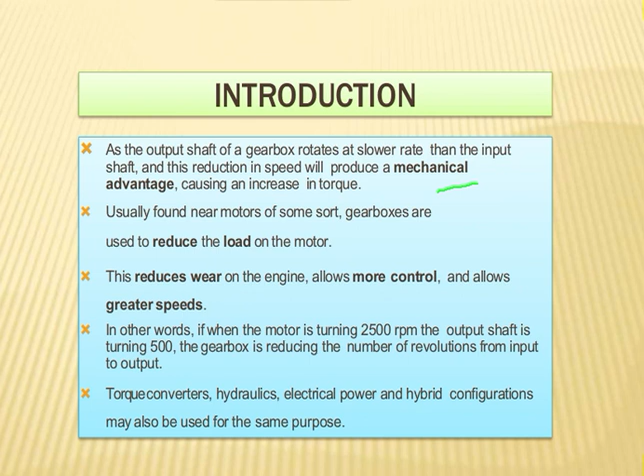What are the basic types of gearboxes? Sliding mesh gearbox, constant mesh gearbox, synchromesh gearbox and epicyclic gearbox. An engine may consist of one or more gearbox. There may be gearboxes which are a mixture of these types.

Sliding mesh gearbox is the oldest type of manual transmissions used in automobiles. However, in this type, the mechanical efficiency was very low and the noise level was quite high in manual transmission. Moreover, the driver required considerable skill in changing the gears.

An improvement was achieved in the form of a constant mesh gearbox, which resulted in higher mechanical efficiencies and lower noise level due to the use of helical gears instead of straight spur gears in case of sliding mesh type. Still, the driver had to adopt double declutching to change gears. A further improvement with the help of a synchromesh device solved this problem also, and these days a synchromesh type of gearbox is a universally used type of automotive manual transmission.

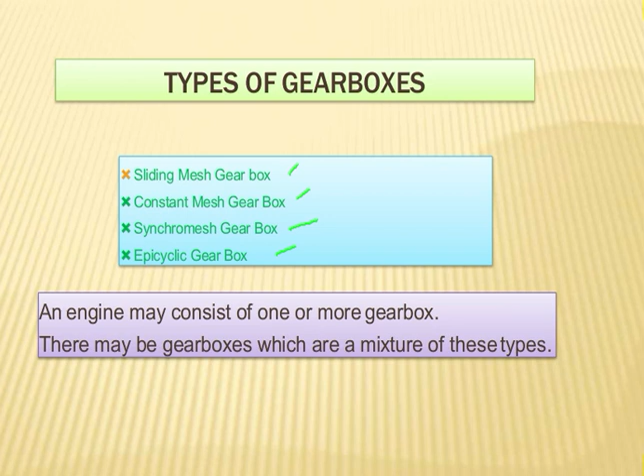This is a schematic diagram of sliding mesh gearbox. This is main drive gear, this one is counter shaft, and this one is main shaft. First gear, second gear, third gear, and top speed engaging dogs.

In this type of gearbox, gears are engaged and disengaged by sliding of the gear wheels. Gear wheels on the main shaft engage with gear wheels on the lay shaft or counter shaft by sliding themselves.

The power comes from the engine to the clutch shaft and hence to the clutch gear, which is always in mesh with a gear on the lay shaft. All the gears on the lay shaft are fixed to it, and as such they are all the time rotating when the engine is running and the clutch is engaged.

3 forward and 1 reverse speeds are attained on suitably moving the gear on the main shaft by means of selector mechanism.

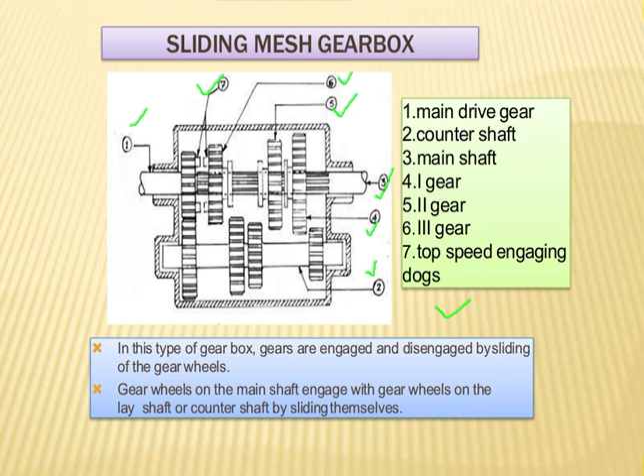Constant mesh gearbox. This is the schematic diagram of constant mesh gearbox. First speed gear, second speed gear, main shaft, third speed gear, top and third speed engaging dogs, top gear, primary shaft or main drive gear, and counter shaft or cluster gear.

In this case, gear wheels on the main shaft and lay shafts are constantly engaged and the rotary motion is transmitted to the main shaft by engaging dog clutches. In this type of gearbox, all the gears are in constant mesh with the corresponding gears on the lay shaft.

The gears on the main shaft, which is splined, are free. The dog clutches are provided, which are free to slide on the main shaft. The gears on the lay shaft are, however, fixed.

When the left dog clutch is slid to the left by means of the selector mechanism, its teeth are engaged with those on the clutch gear and we get the direct gear. The same dog clutch, however, when slid to the right, makes contact with the second gear and second gear is obtained.

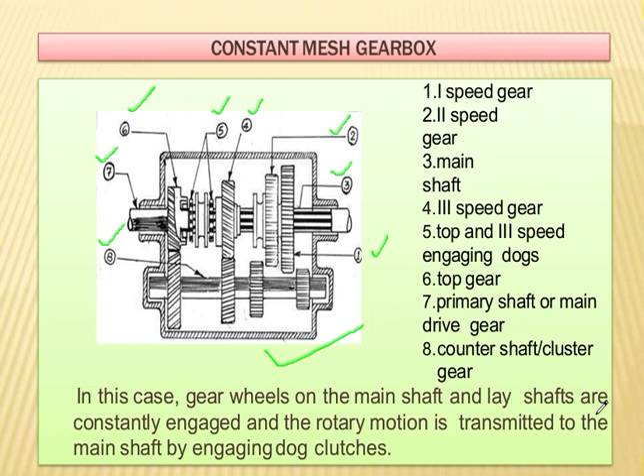This is another schematic diagram of constant mesh gearbox. You see, this is the lay shaft, this one is clutch, output shaft, first gear, this one is second gear, this one is third gear, this one is selector fork, this is dog gear, this one is fourth gear, and this one is fifth gear.

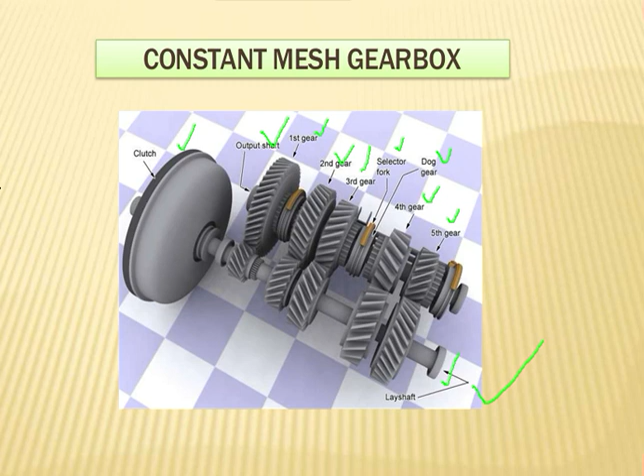This is another schematic diagram of constant mesh gearbox. You see, this one is primary drive, this one is clutch, this one is engagement dog, input shaft, output shaft, and shift forks.

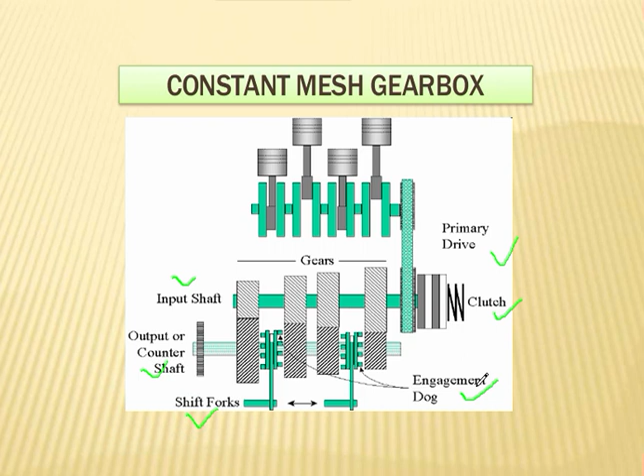Advantages of constant mesh gearbox over sliding mesh gearbox. Helical and herringbone gears can be employed in these gearboxes and therefore constant mesh gearboxes are quieter.

Since the gears are engaged by dog clutches, if any damage occurs while engaging the gears, the dog unit members get damaged and not the gear wheels.

By suitably designing the dog clutch, the gear changing can be made easier. Damage to the dog clutch is less likely because all the teeth are engaged at a time.

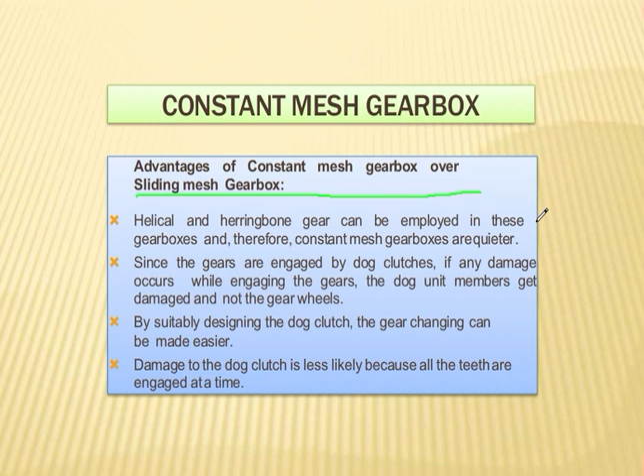Synchromesh gearbox.

This type of gearbox is similar to the constant mesh type in that all the gears on the main shaft are in constant mesh with the corresponding gears on the lay shaft. The gears on the lay shaft are fixed to it, while those on the main shaft are free to rotate on the same.

Its working is also similar to the constant mesh type, but in the former there is one definite improvement over the latter. This is the provision of synchromesh device which avoids the necessity of double declutching.

The parts which ultimately are to be engaged are first brought into frictional contact which equalizes their speed, after which these may be engaged smoothly.

But I have told that if the car is moving, the output shaft is always turning. That is because it is ultimately connected to the wheels.

The lay shaft is usually connected to the engine, but it is free spinning once the clutch has been operated. Because the gears are meshed all the time, the synchro brings the lay shaft to the right speed for the dog gear to mesh. This means that the lay shaft is now spinning at a different speed to the engine.

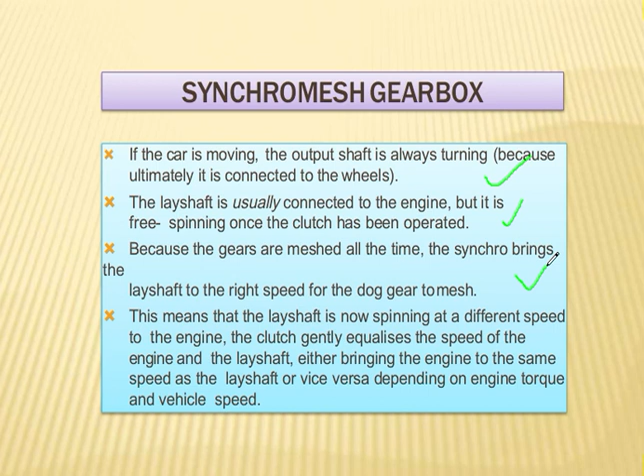The clutch gently equalizes the speed of the engine and the lay shaft, either bringing the engine to the same speed as the lay shaft or vice versa, depending on engine torque and vehicle speed.

As it approaches the helical gear, it makes friction contact with the conical hole. The more contact it makes, the more the speed of the output shaft and free spinning helical gears are equalized before the teeth engage.

This is all about synchromesh gearbox.

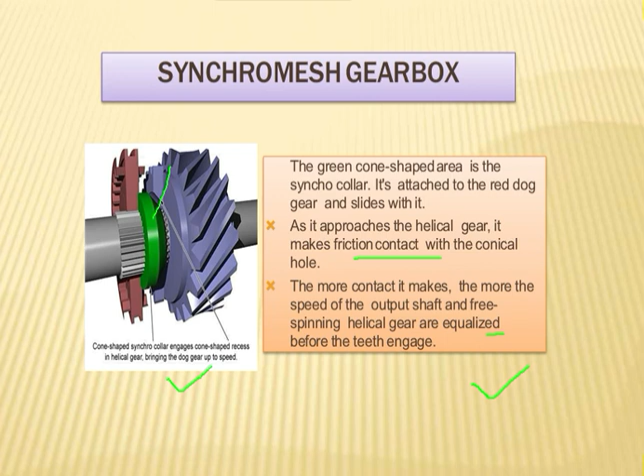Let's discuss epicyclic gearbox. Present day automatic transmissions consist of multiple clutches, torque converter and epicyclic gearbox. Automatic transmissions operate basically by controlling vehicle speed and engine load. Increasing vehicle speed needs changing gears upwards, whereas increasing engine load necessitates change from higher to lower gears.

For the speed factor, a sensitive control unit, mechanical, hydraulic or electrical, is driven off a suitable point beyond transmission, and thus its control action becomes sensitive to vehicle speed. The engine load factor is introduced by the position of the accelerator pedal. Thus, the engine load sensitive control unit is operated by the depression of the accelerator pedal.

An epicyclic gearbox consists of 2, 3 or even 4 epicyclic or planetary gear sets. A simple set has a sun gear about which planets turn around. These planet gears are carried by a carrier and a shaft and are also in mesh internally with a ring gear, which is also called internal gear or annulus.

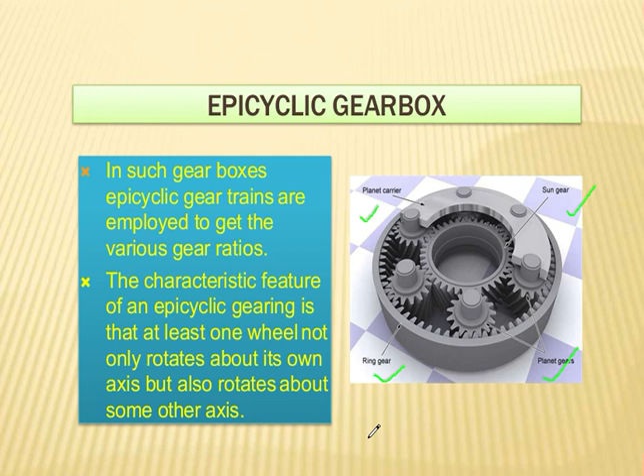Automatic gearboxes typically use one or more compound planetary gear sets instead of chaining regular gear sets together. They look just like a regular planetary gear set from the outside, but inside there are two sun gears and two sets of intermeshing planet gears. There is still only one ring gear though.

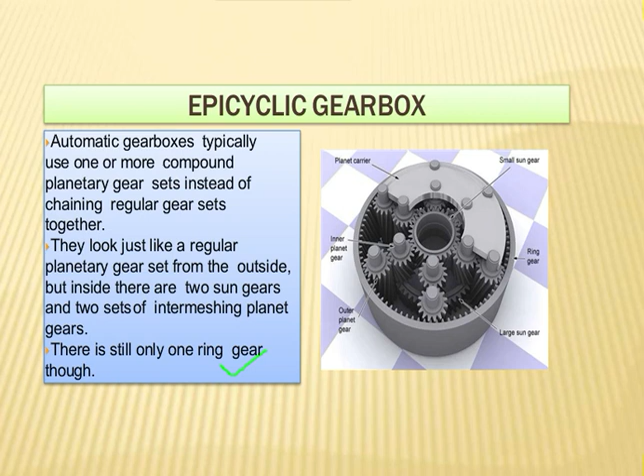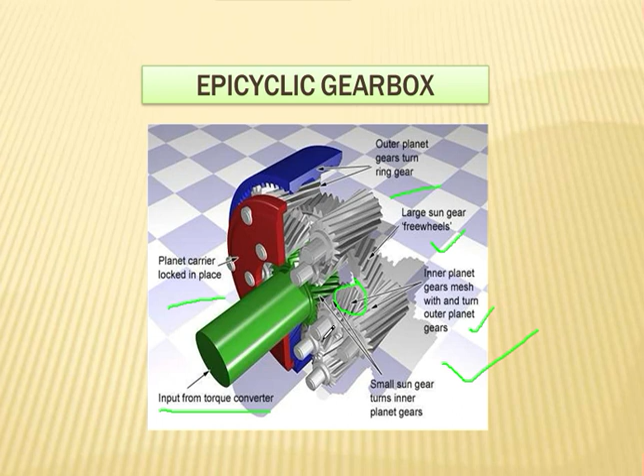Overdrive: the highest gears may be overdrive types that increase the output speed. This is a device to step up the gear ratio in the car. It is fitted in between the transmission and the propeller shaft.

Overdrives have become very popular in the USA. It enables a high cruising speed to be attained with a comparatively low engine speed, up to about 20 to 25% less, on long journeys. This results in less wear of the engine parts and decreased vibration and noise. As the friction losses at lower speeds are less, there is a saving of fuel also with the overdrive.

Overdrive is generally fitted on top gear only, but in some sports cars, overdrives are also fitted on gears other than the top gear, which increases the torque ratios available. For example, when overdrive is fitted on top, third and second gear, 7 forward speeds or torque ratios are available.

When the sun gear is locked with the casing, that is, it becomes stationary, the speed of the output shaft is increased, that is, overdrive is engaged. When, however, the sun gear is locked to the carrier or to the ring, solid drive through the gear train is obtained. Thus, depending on the locking of the sun gear with casing or with carrier, the overdrive or the normal direct drive is obtained.

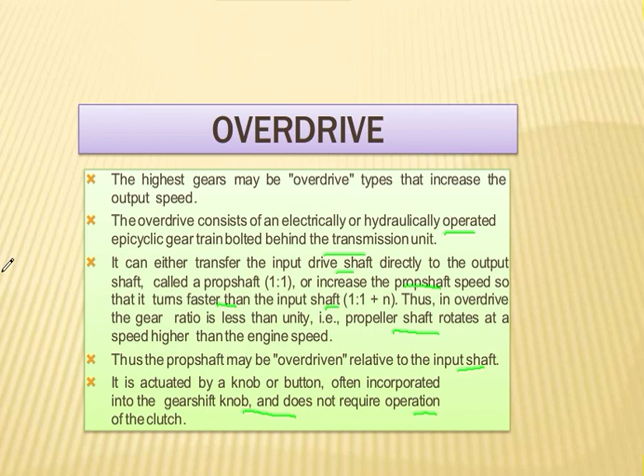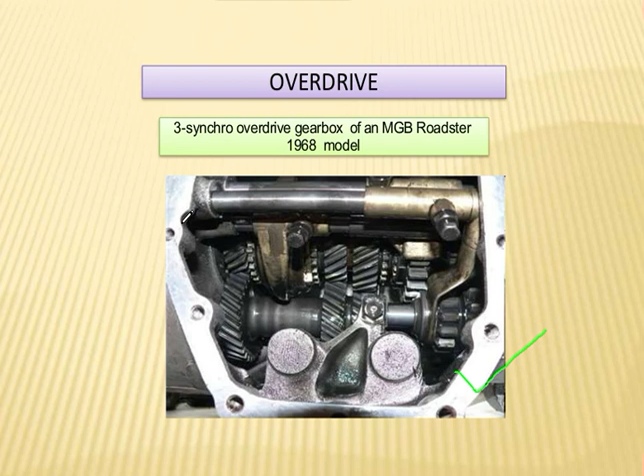Types of transmissions: common types include manual transmission, semi-automatic transmission and automatic transmission. Uncommon types include dual clutch transmission, continuously variable transmission, infinitely variable transmission, electric variable transmission, hydrostatic, hydrodynamic and electric.

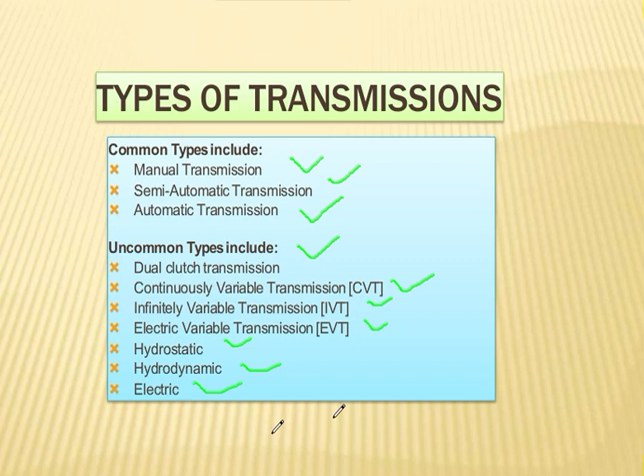Manual transmission I have already told earlier. A simple but rugged sliding mesh or unsynchronized, non-synchronous system found in racing cars, older heavy-duty trucks, and some agricultural equipment. Here, straight-cut spur gear sets are spinning freely and must be synchronized by the operator matching engine speed to road speed to avoid noisy and damaging gear clash.

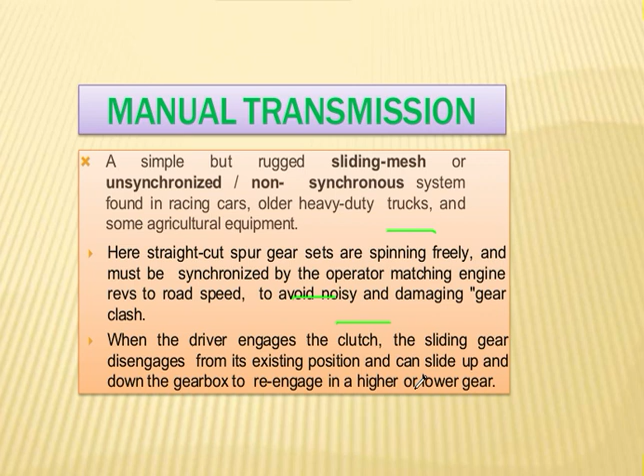When the driver engages the clutch, the sliding gear disengages from its existing position and can slide up and down the gearbox to re-engage in a higher or lower gear.

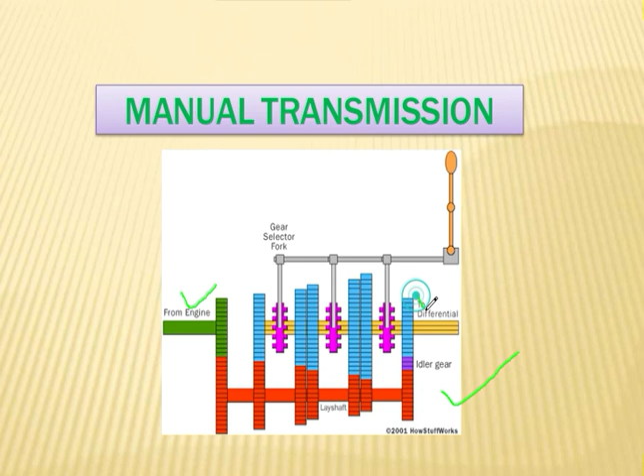This is the schematic diagram of manual transmission from engine to the differential by gear selected. This one is layshaft.

Sequential gearbox: manual transmissions use the standard H pattern in the shifter. The manual transmission in a motorcycle is nothing like this. On a motorcycle, you shift gears by clicking a lever up or down with your toe. It is a much faster way to shift. This type of transmission is called a sequential gearbox or a sequential manual transmission.

It turns out that most race cars use sequential gearboxes as well.

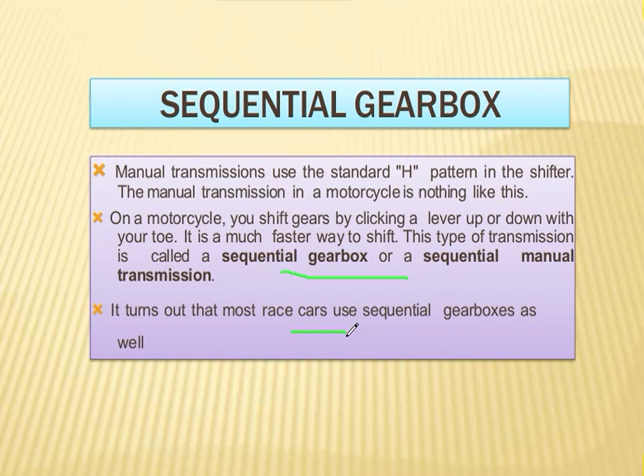There are 3 forks, 1, 2 and 3, controlled by these 3 rods that are engaged by the shift lever. There is still a set of gear selector forks that move collars that engage gears. The only difference is the way the control rods are manipulated. The H pattern is eliminated and replaced with a different motion. In a race car, the motion of the shift lever is either push forward to upshift or pull backward to downshift.

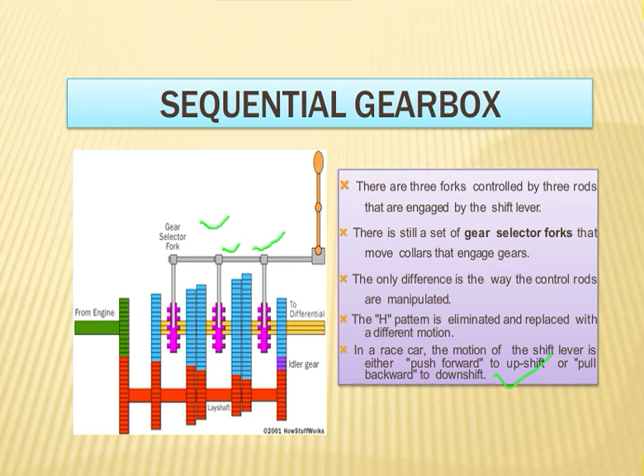Semi-automatic transmission: this is the schematic diagram of semi-automatic transmission system. This one is motor or engine. This one is second gear. This one is third gear. This one is first and this one is fourth gear. This one is differential.

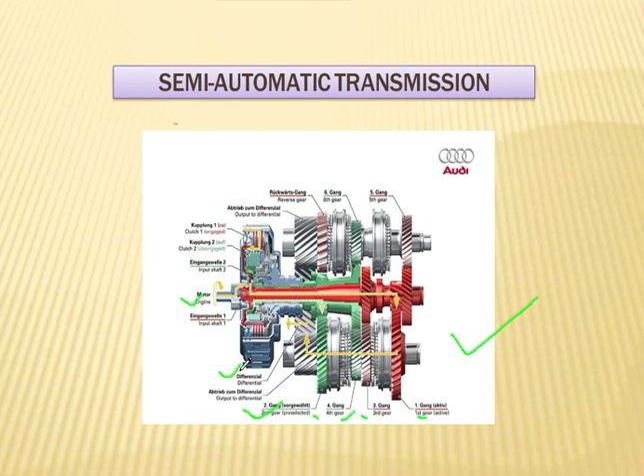Automatic transmission: epicyclic gearing or planetary gearing are used in an automatic transmission. An automatic transmission will select an appropriate gear ratio without any operator intervention. They primarily use hydraulics to select gears depending on pressure exerted by fluid within the transmission assembly.

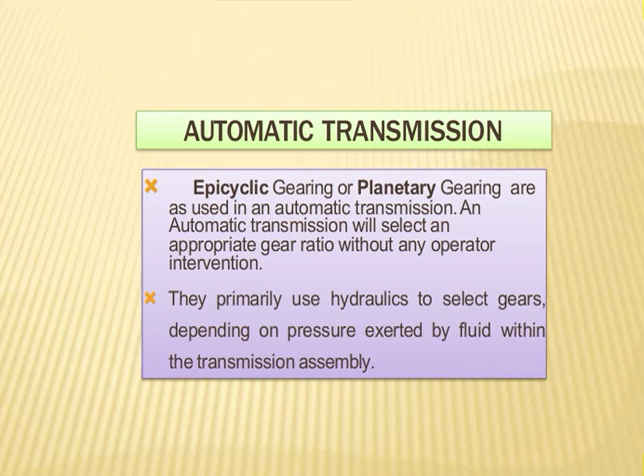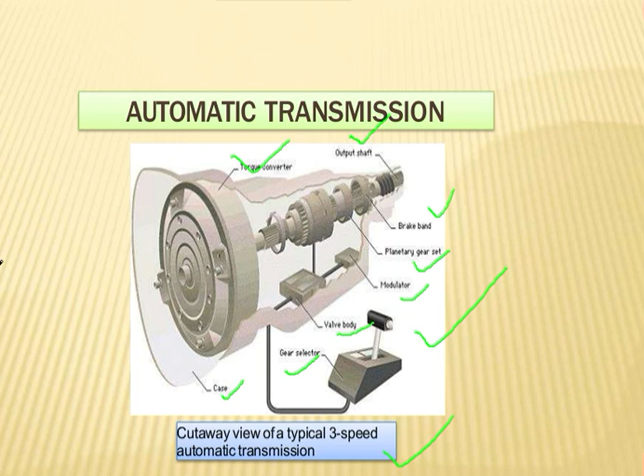What are the advantages of automatic transmission? Let's discuss. If the car is in overdrive on a 4-speed transmission, the transmission will automatically select the gear based on vehicle speed and throttle pedal position. If you accelerate gently, shifts will occur at lower speeds than if you accelerate at full throttle. And if you floor the gas pedal, the transmission will downshift to the next lower gear.

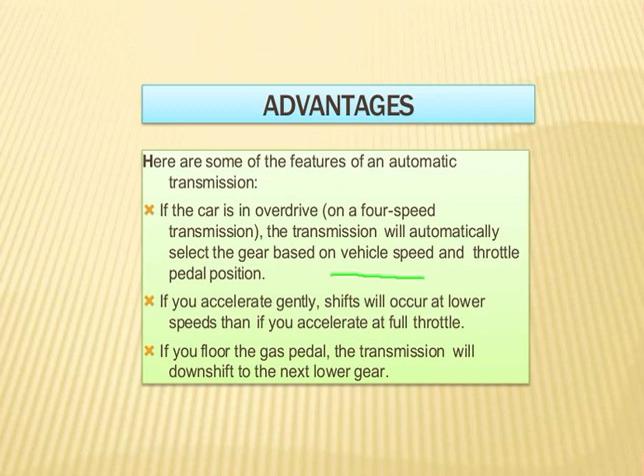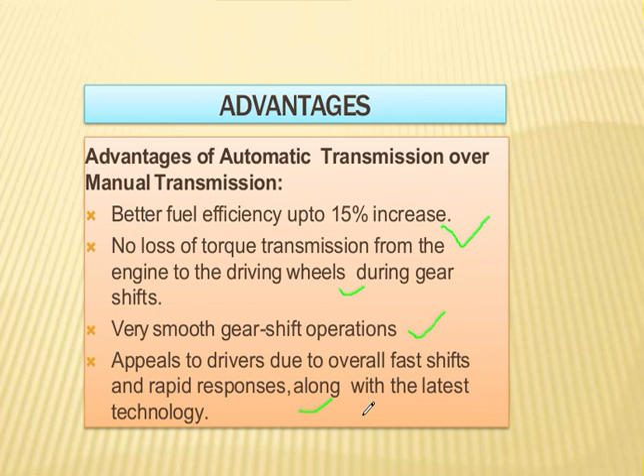Advantages of automatic transmission over manual transmission: better fuel efficiency, up to 15% increase. No loss of torque transmission from the engine to the driving wheels during gear shifts. Very smooth gear shift operations. Appeals to drivers due to overall fast shifts and rapid responses along with the latest technology.

What are the main disadvantages of automatic transmission over manual transmission? Its mechanical efficiency is much less than that of a manual transmission type. It requires a specialized transmission fluid or lubricant which is expensive and needs to be changed regularly. It's expensive to manufacture, it is heavier than a conventional manual transmission gearbox, and it has a much higher rate of failure due to complexity.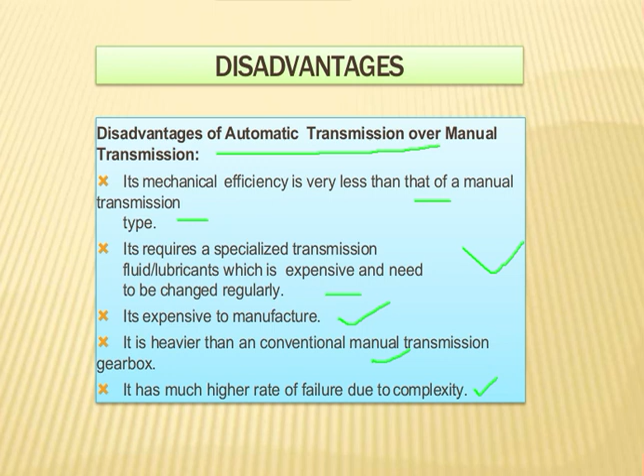These are the main disadvantages of automatic transmission over manual transmission. From this video lecture, you will get knowledge about manual transmission, automatic transmission and semi-automatic transmission. You also acquire knowledge about sliding mesh type gearbox, synchro mesh gearbox, constant mesh gearbox, epicyclic gearbox and overdrives.